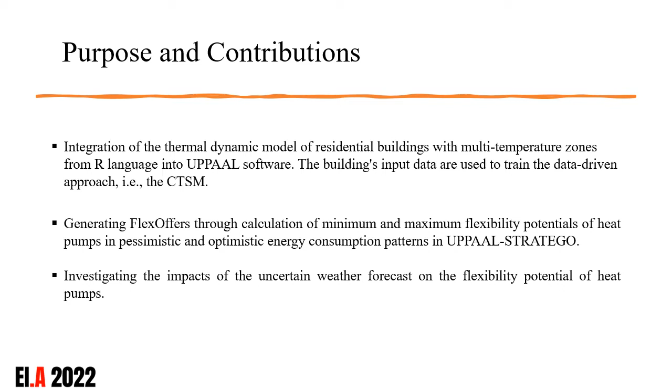So the outcome of the CTSM will be the heat resistance and heat capacities, which are called thermal dynamic coefficients. So we incorporate the thermal dynamic coefficients into the flex offer approach in UPPAAL-STRATEGO. In UPPAAL-STRATEGO, we aim to generate flex offers.

The flexibility potential of heating system in residential buildings stems from the difference between a lower and upper threshold of indoor temperature. In fact, the occupants or residents of the building set a comfort temperature as a flexible bound, including minimum and maximum indoor temperature.

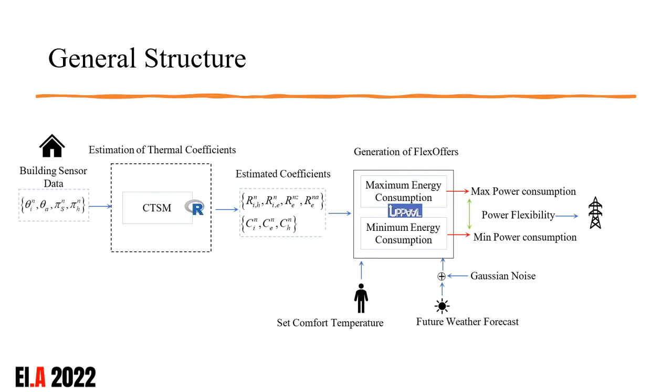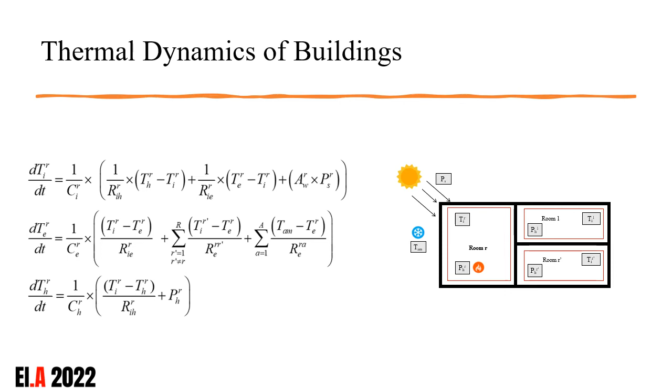As discussed, we have used CTSM software to estimate thermal dynamic coefficients. CTSM is an open source software developed by DTU Compute and is publicly available. So the input of the CTSM are building sensor data, including indoor temperature and heat consumption of the building, as well as the weather condition, including ambient temperature and solar power radiation.

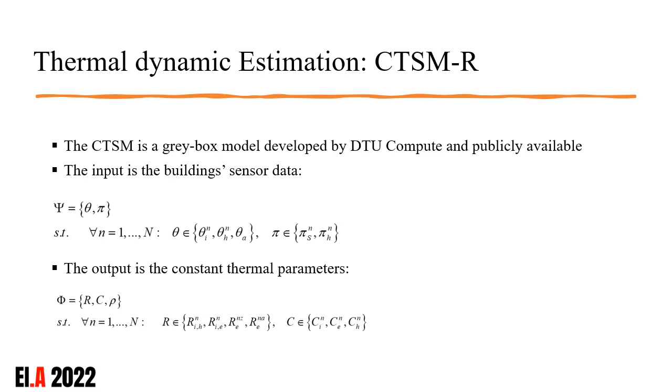And finally, the output of the CTSM software are the estimation of thermal dynamic coefficients. These coefficients include heat resistance and heat capacity of the building.

Probabilistic flex offers calculate flexibility potentials of energy systems in response to stochastic variables. In this study, we consider the uncertain weather data. Therefore, the flex offers fit the probability distribution functions for minimum and maximum energy consumption patterns. And finally, a success function evaluates the cumulative distribution function of the heating system.

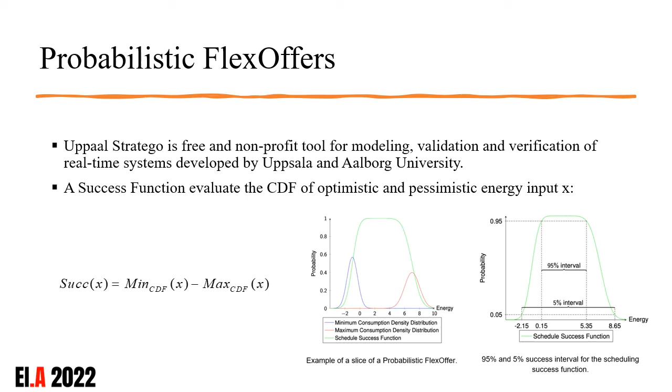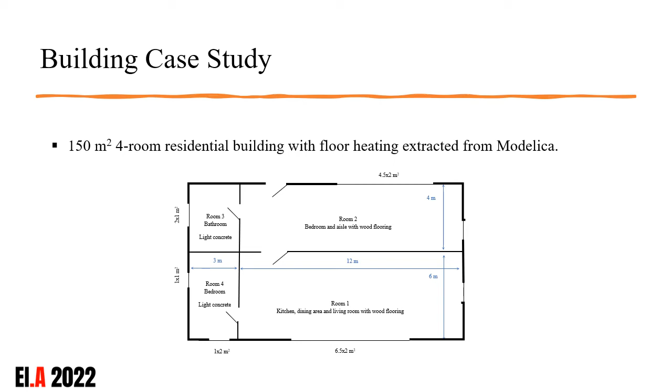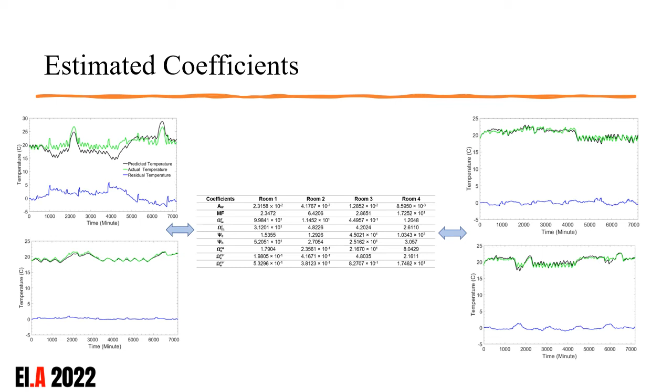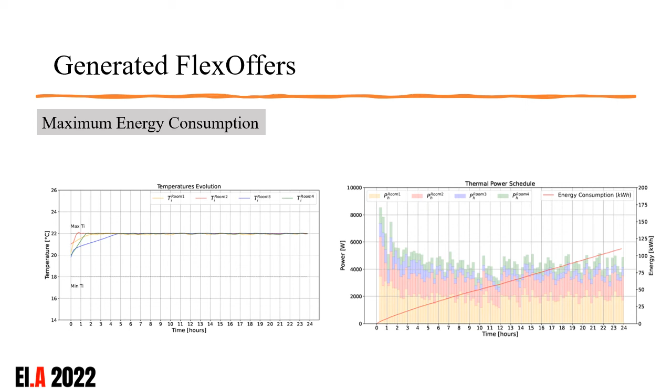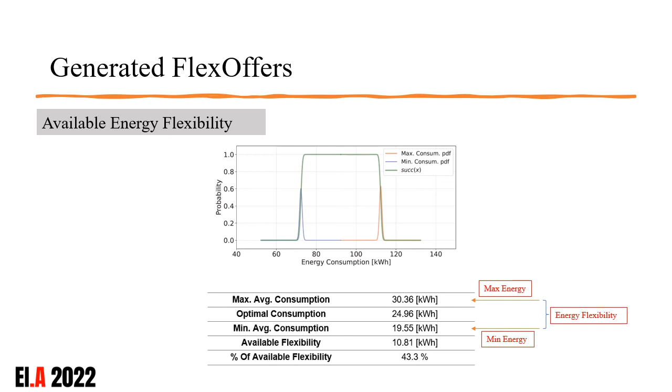To conclude the study, we can say that in this study, we have used 2 open source software, the CTSM to estimate thermal dynamics of buildings and the UPPAAL to generate flex offers. Both software are publicly available on their websites and provide great opportunities for researchers to develop their studies.

The CTSM shows high accuracy in estimation of the thermal dynamics. It's quite fast and converges in less than 5 minutes for each room. So the CTSM is a reliable software to study building thermal dynamics.

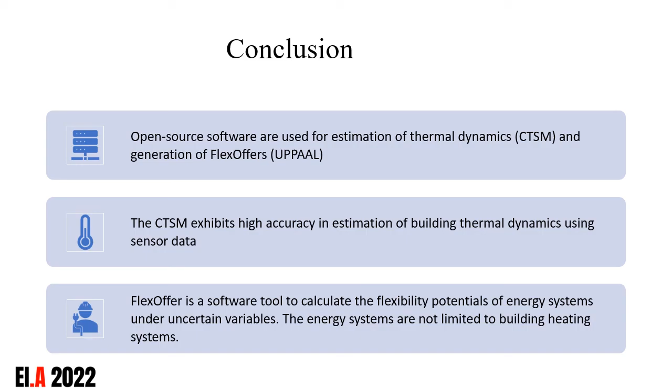And the third point is that the flex offer approach evaluates flexibility potentials of energy systems in response to stochastic variables. This way, the energy systems are not necessarily limited to building heating systems. For example, the flex offer approach can be developed to unleash flexibility potential of commercial refrigerators in response to stochastic electricity prices. And finally, thank you very much for your attention to my presentation.